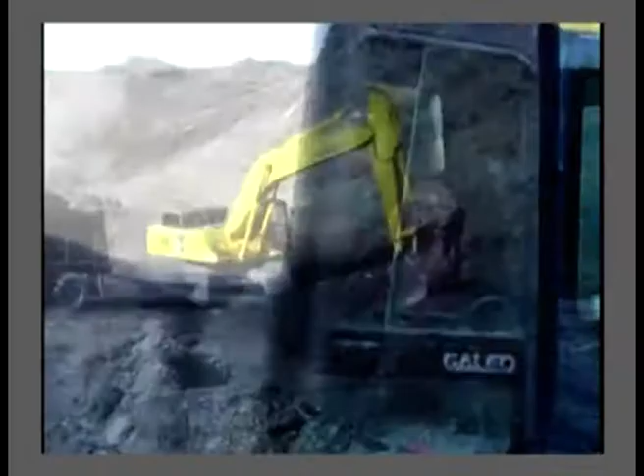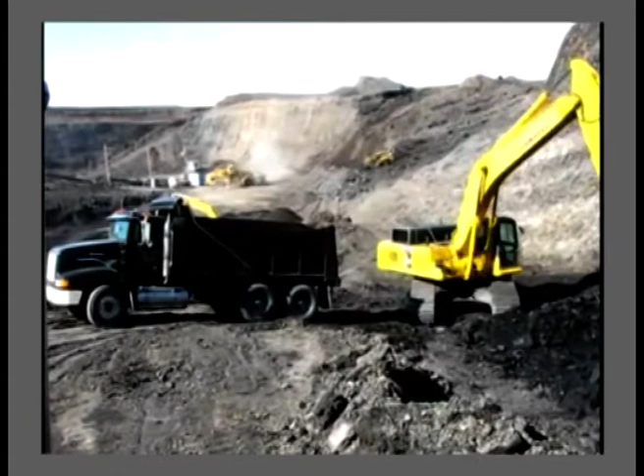Module 1. Methane is a gas formed as a part of the process of coal formation. When coal is mined, methane is released from the coal seam and the surrounding disturbed rock strata. Methane can also be released as a result of natural erosion or faulting. The methane content in coal seam generally increases the deeper the seam exists and also with its age.

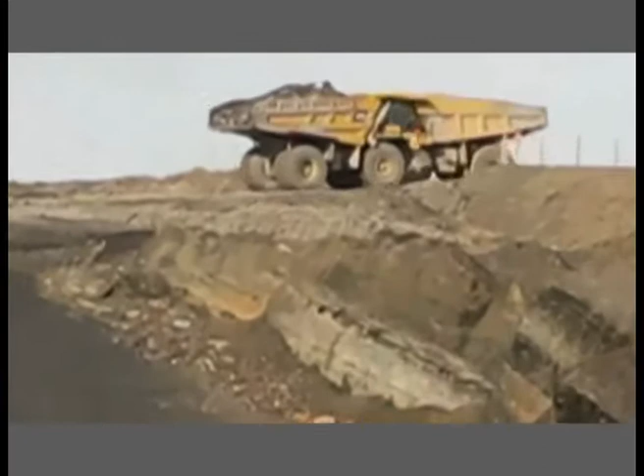As the depth of the coal seam increases, so does the pressure level. This in turn reduces the level of permeability, causing methane to be much more tightly bound to the coal and surrounding rock strata. Underground mining can therefore produce substantially greater levels of methane than surface mining. In fact, underground mines account for the overwhelming majority, up to 90%, of all methane emissions from the coal sector.

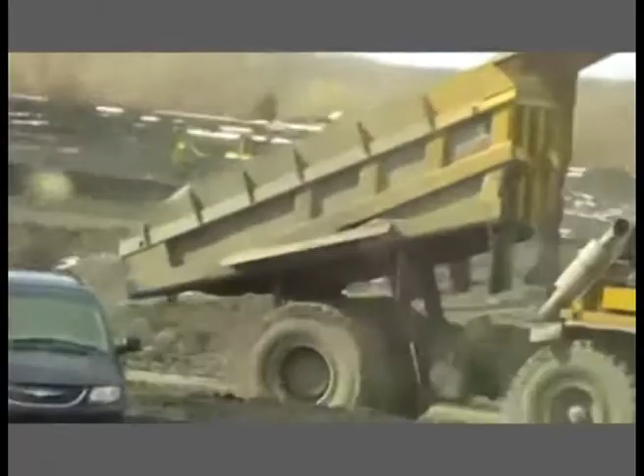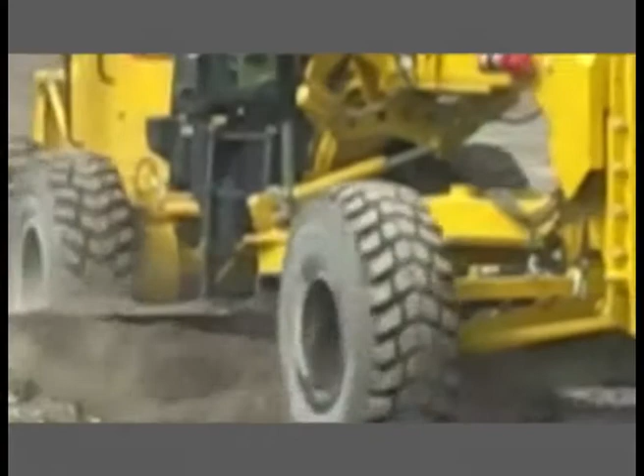When coal is mined underground, this methane not only becomes a potent source of pollution and accident by way of explosions, but also it adds to the ventilation cost. Furthermore, it adds to the volume and quantity of GHG, greenhouse gases, when exhausted from the underground in the surface atmosphere.

Thermal power plants are the single largest stationary source of pollution in any country. The toxins these coal-fired power plants produce severely damage both human health and the environment. This in turn lowers the quality of life. Additionally, it also exerts severe adverse impacts on the wildlife, aquatic life, plants and trees, etc.

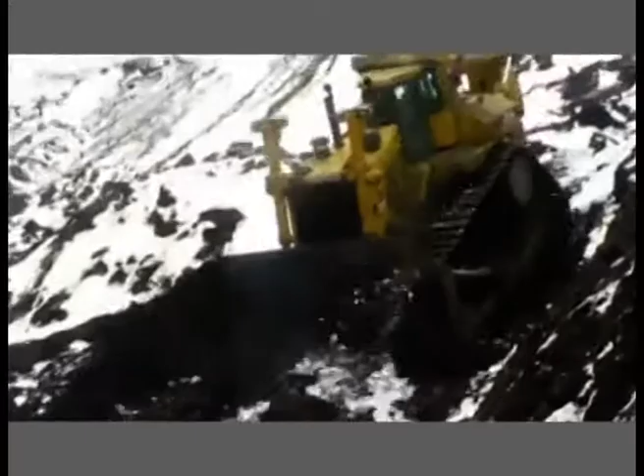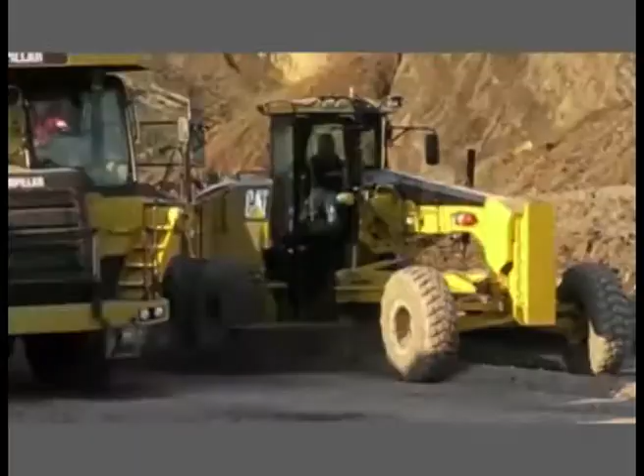Besides carbon dioxide, other major ingredients in the polluted air due to coal burning include sulfur dioxide, nitrogen oxide, carbon monoxide and fly ash. Given this, the mining as well as burning of coal are increasingly gaining the attention of all concerned, not only as a prime energy resource, but also because of a host of environmental challenges offered due to the mining and burning of the coal.

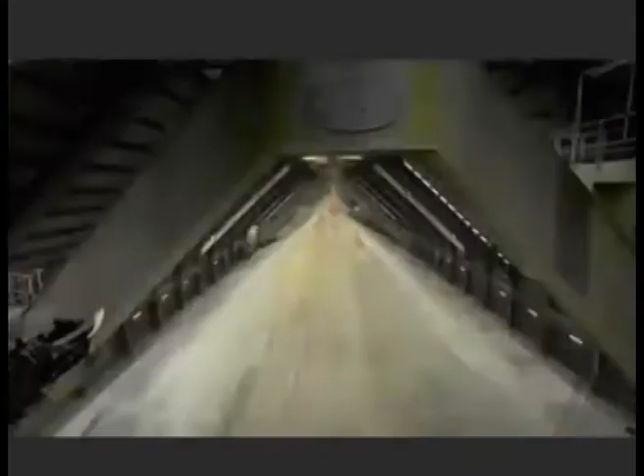Module 2. This module consists of description of atmospheric impact of the gases and fly ash. Let us discuss the impacts one by one. To start with, sulfur dioxide, SO2. Sulfur dioxide is emitted during burning coal and other fossil fuels, of course. While burning, the coal converts into acid gases, that is sulfuric gases and sulfur particulate matter. These gases and particulate matter are emitted in the atmosphere. It is a major causation of acid rains, as will be described later.

The health effects of these emissions on human beings include airway irritation, heart rhythm destabilization, asthma attacks, etc. Number 2 is nitrogen oxide, popularly known as NOx. It is a main ingredient in acid rain and ozone smog.

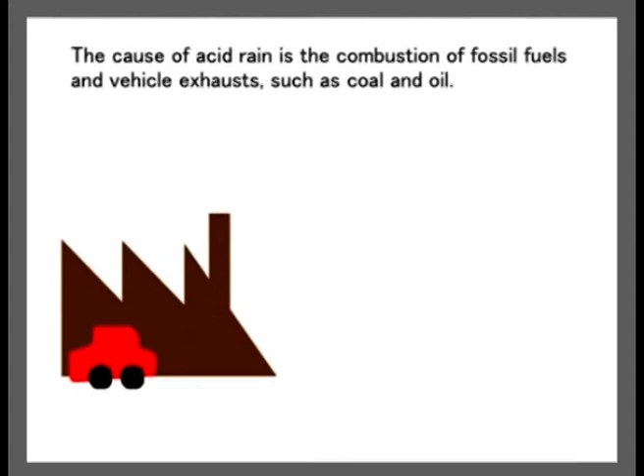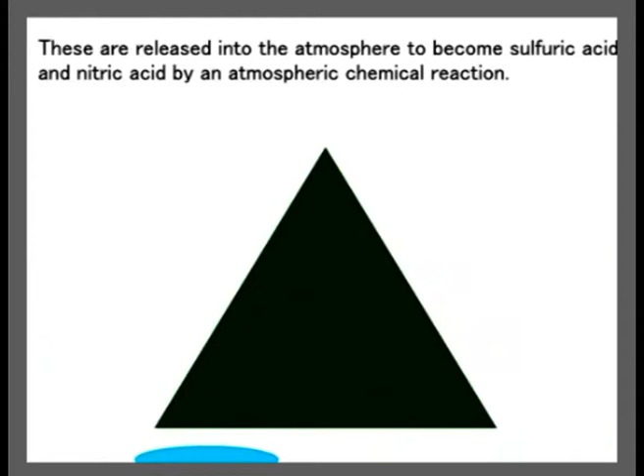Acid rain. Acid rain or acid deposition occurs when sulfur dioxide and nitrogen oxide react with water and oxygen in the atmosphere to form acidic compounds, most commonly sulfuric and nitric acids. These acidic compounds then either mix with natural precipitation and fall to the earth as acid rain, or remain dry and then settle to the ground.

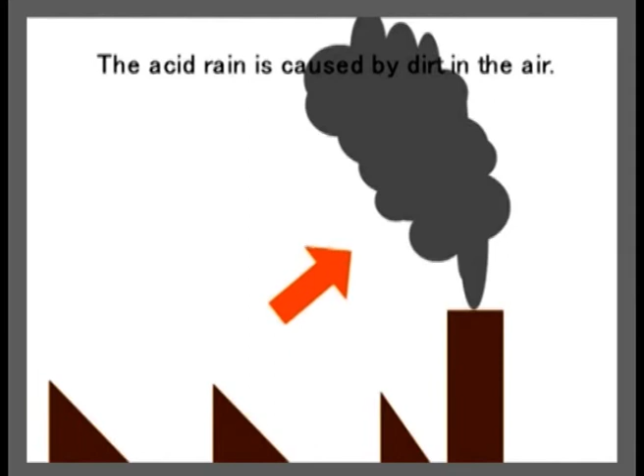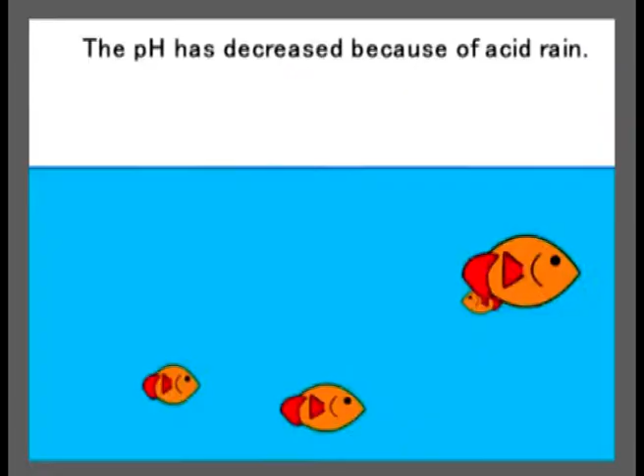Acid rain destroys ecosystems, including streams and lakes, by changing their delicate pH balance, making them unable to support life. Acid rain can destroy forests, devastate plant and animal lives, and at times it may also adversely affect man-made monuments and buildings to effectively destroy natural and historical treasures.

Number 2 is the ozone smog. The ozone smog is formed at ground level when sunlight mixes with nitrogen oxides and hydrocarbonaceous vapors emitted by power and mining plants. It contributes to airway irritation, coughing, wheezing, asthma attacks and immune suppression.

Number 3 is the carbon dioxide. Coal-fired electric power plants comprise the single biggest source of carbon dioxide emissions in the world. Burning of coal releases carbon dioxide in the atmosphere, and it is needless to reaffirm that carbon dioxide is the largest source of greenhouse gases, GHG, in the world. Currently, there is almost 30% more carbon dioxide in the atmosphere than at the commencement of the Industrial Revolution.

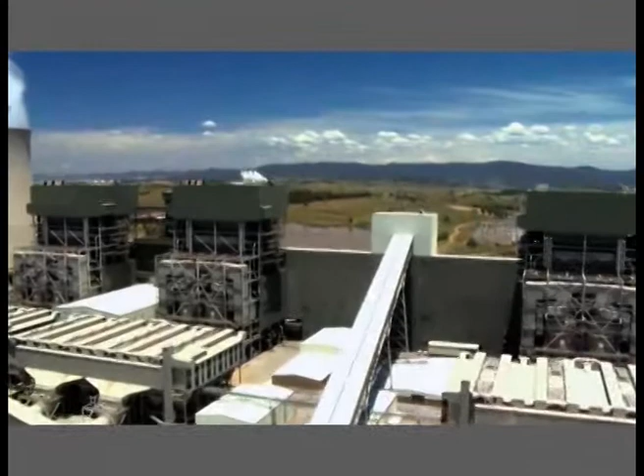Furthermore, we are well on the way to doubling the carbon dioxide level in the atmosphere during this century itself. So amazing. However, coal-fired power plants have the highest output rate of carbon dioxide per unit of electricity among all fossil fuels.

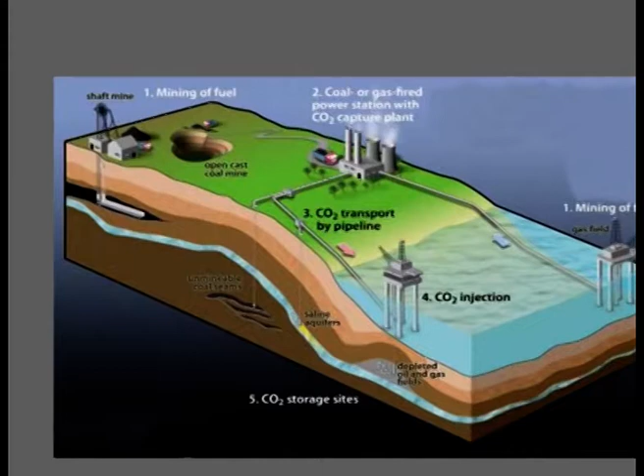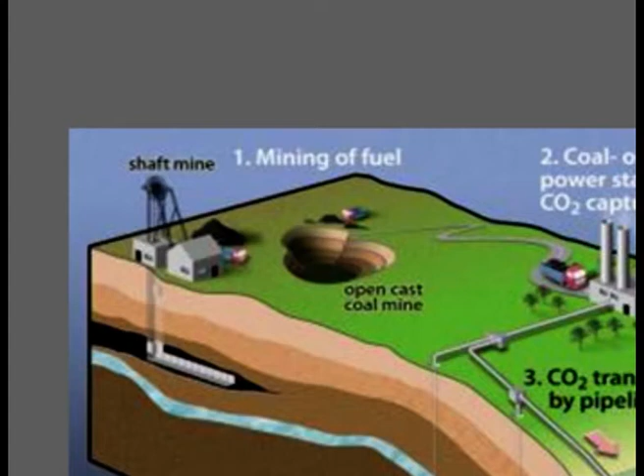Now, figure 1 will illustrate the release of carbon dioxide to the atmosphere by various sources and also its safe disposal sites. The figure 1 illustrates that there is a mining shaft which is mining coal from the underground deposit. Then there is an open cast mine, coal which is lying beneath the surface of earth, and thereafter you can also see the mining of fuel offshore.

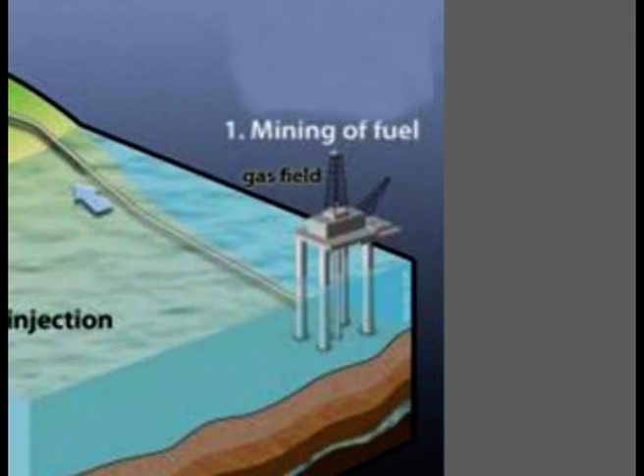All these 3 units are mining fossil fuels and transporting the fossil fuel to a coal or gas fired power plant which delivers carbon dioxide to the atmosphere. If it is delivering the carbon dioxide to the atmosphere, it will be dangerous because, as already explained, carbon dioxide is a greenhouse gas. So, we need to capture this gas at the plant and we have to dispose it at the safe sites.

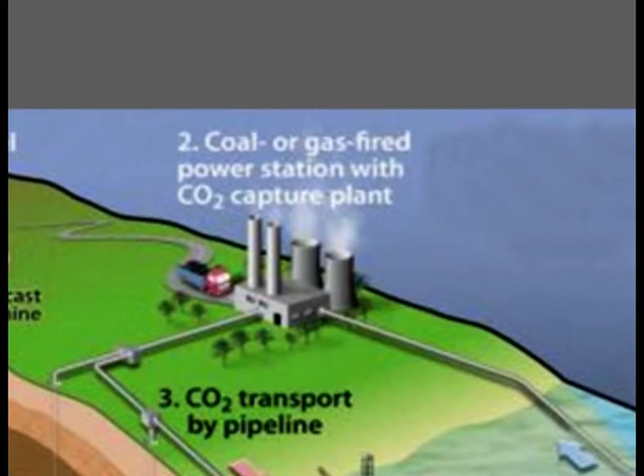Illustrated in the figure, you can see that a pipeline is bringing the carbon dioxide which has been captured in the thermal power plant or gas fired power station. It is being transmitted through the pipeline to the unminable coal seams, the saline aquifers, and the third point is the depleted oil and gas fields.

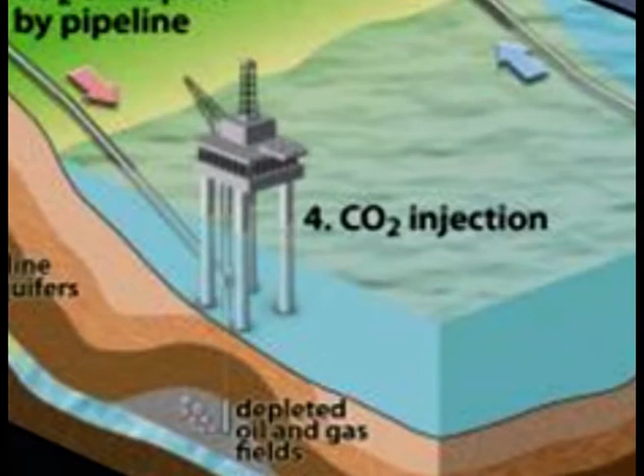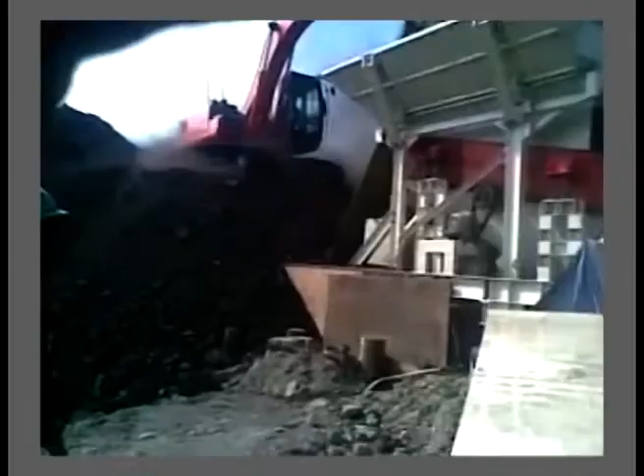Number 2 is the fly ash. Fly ash primarily comes from coal fired electricity generating power plants. These power plants grind coal to powder fineness before it is burnt. Fly ash, the mineral residue produced by burning coal, is captured from the power plant and it is exhausted and collected for use. Fly ash is a fine glass powder recovered from the gases of burning coal during the production of electricity. These micron sized earth elements consist primarily of silica, alumina and iron.

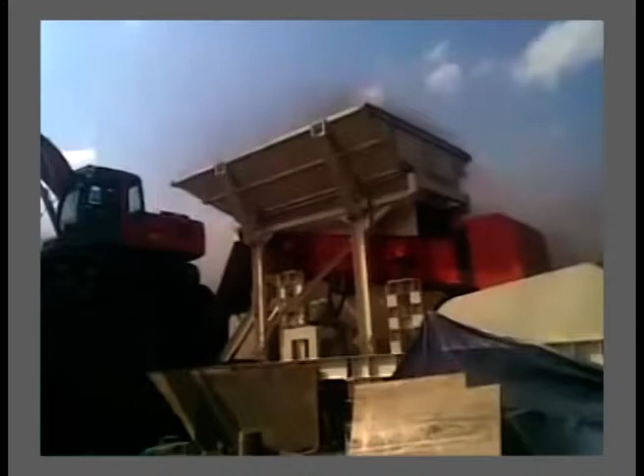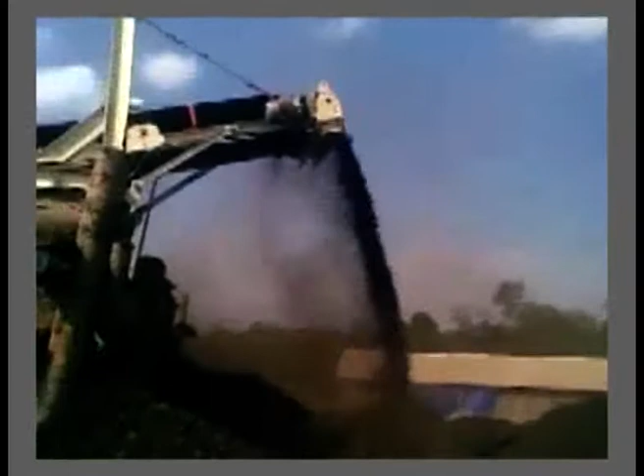Coal fired power plants using pulverized coal or lignite as fuel generate large quantities of fly ash as a byproduct. With the increase in commissioning of several super thermal power plants with large capacity and with the increasing use of low grade coal of high ash content, the amount of generation of ash from them is increasing at exponential rates. This poses serious ecological problems.

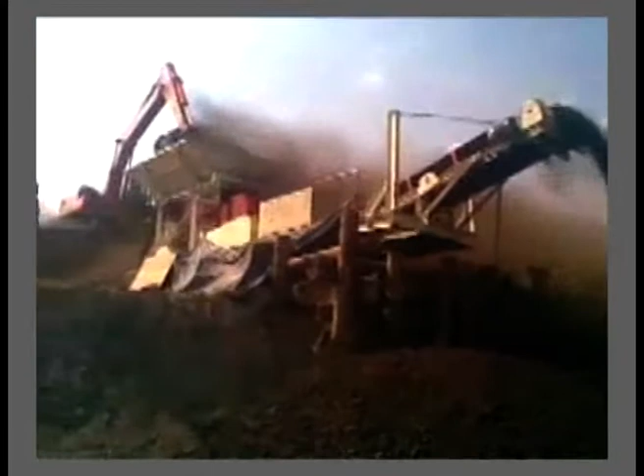Most of the ash generated from the power plants is disposed of in the vicinity of the plant as a waste material, covering several hectares of valuable land. Looking at the nuisances posed by fly ash, there exists an emergent need for its safe disposal and effective utilization. The properties of fly ash depend on several variables such as coal source, degree of pulverization, design of boiler units, loading and firing conditions, handling and storage methods, etc.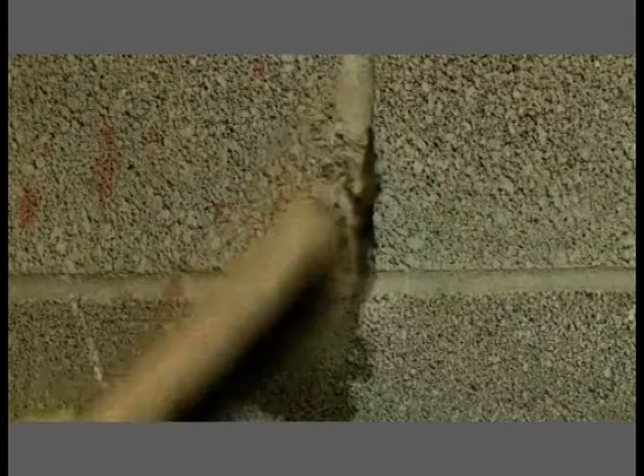In an industrial context, fly ash usually refers to ash produced during combustion of coal. It includes substantial amounts of silicon dioxide, both amorphous and crystalline, and calcium oxide. In earlier times, fly ash was generally released into the atmosphere, but pollution control equipment mandated in recent decades requires its capture. The fly ash is generally stored at coal power plants or placed in landfills. It is often used as a pozzolan to produce hydraulic cement or hydraulic plaster, or as a partial replacement of Portland cement in concrete production.

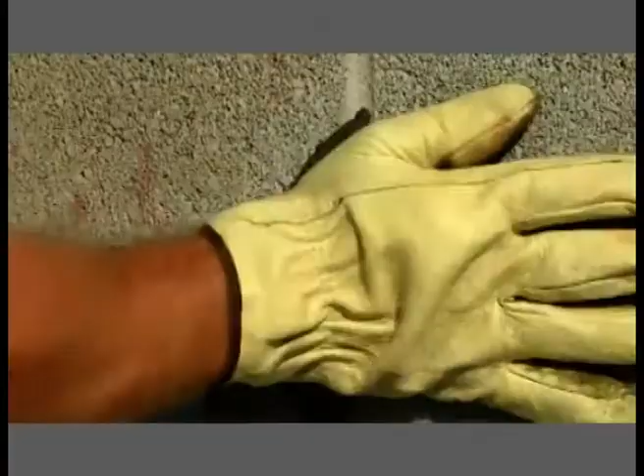At present in India, the focus is on demonstration of coal ash utilization technologies such as fly ash characterization, its agricultural related studies and applications, construction of ash ponds and dams, roads and embankments, and also reclamation of ash ponds for human settlement, underground mine fills, etc. Only a small quantity of the total ash produced is utilized in concrete, brick making, soil stabilization treatment, etc. The bulk utilization of ash is yet to begin in full swing.

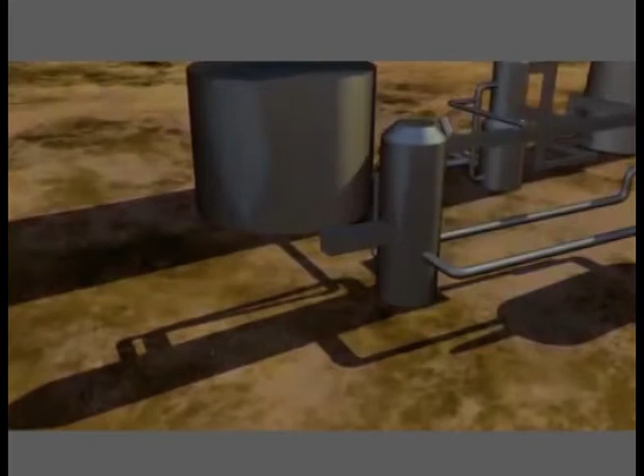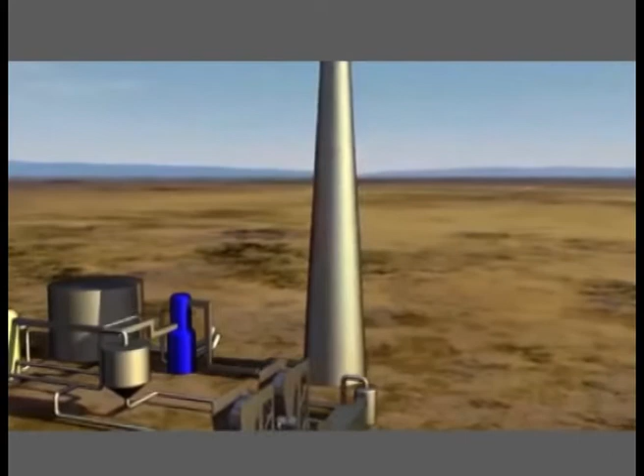Number 3, remedial measures. What are the remedial measures to overcome the challenges posed to the atmospheric conditions by these gases? So, let us discuss one by one each of the gases and how to overcome the threats posed by them. Number 1 is sulfur dioxide. Flue gas desulfurization (FGD) systems are used to remove sulfur dioxide. Wet scrubbers are the most widespread method and can be up to 99% effective. A mixture of limestone and water is sprayed over the flue gas.

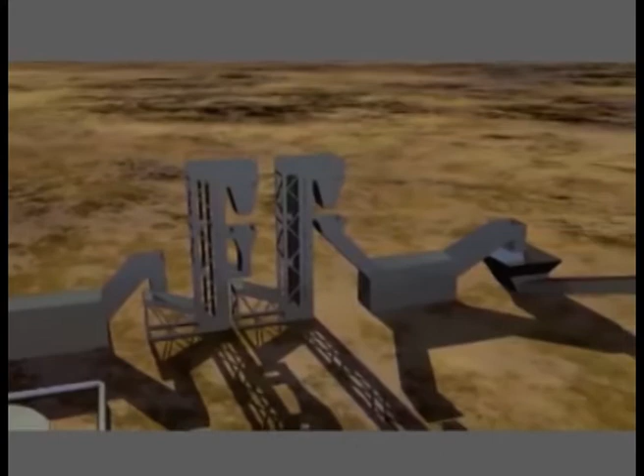Flue gas is the gas which is exhausted from the power plants. So, this flue gas has to be mixed, and this mixture reacts with the sulfur dioxide to form gypsum, a calcium sulphate, which is removed and used in the construction industry.

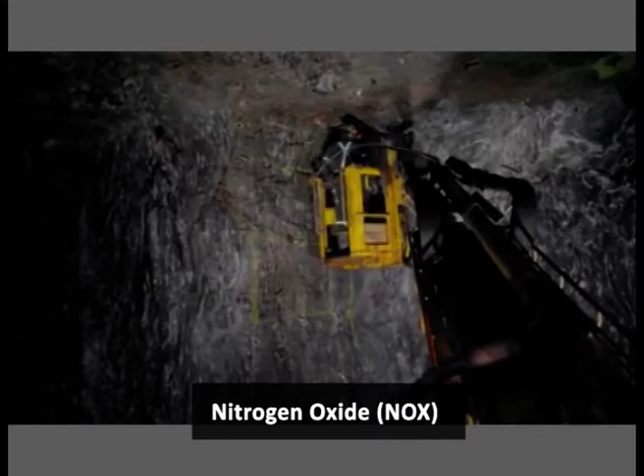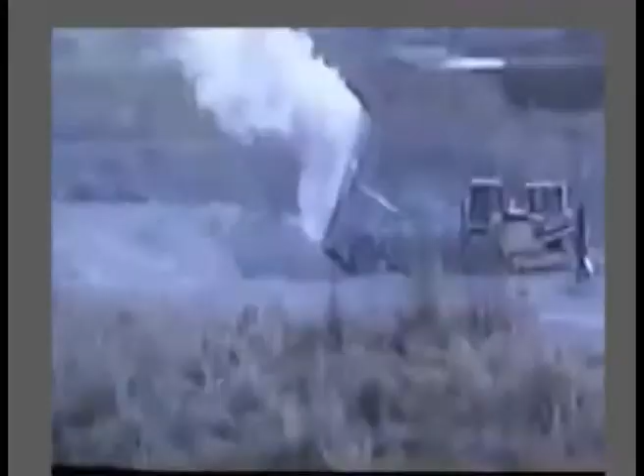Next is nitrogen oxide, NOx. NOx reduction methods include the use of low NOx burners. These specially designed burners restrict the amount of oxygen available in the hottest part of the combustion chamber where the coal is burnt. This minimizes the formation of the gas and requires less post combustion treatment.

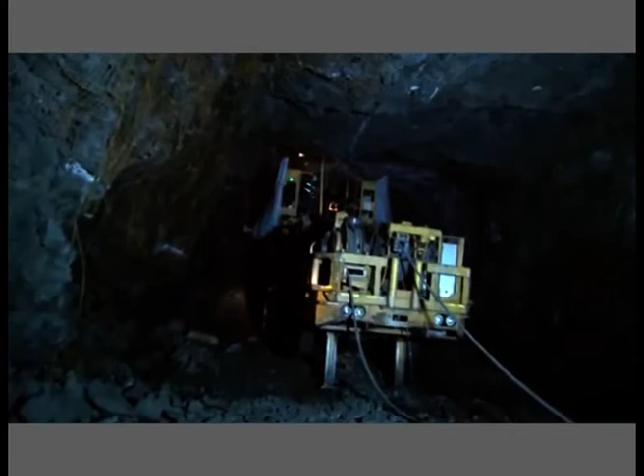NOx burners reduce NOx emission by 40%. Further, reburning reduces it to almost 70%, followed by selective catalytic reduction to finally clean the flue gases from NOx up to 90%.

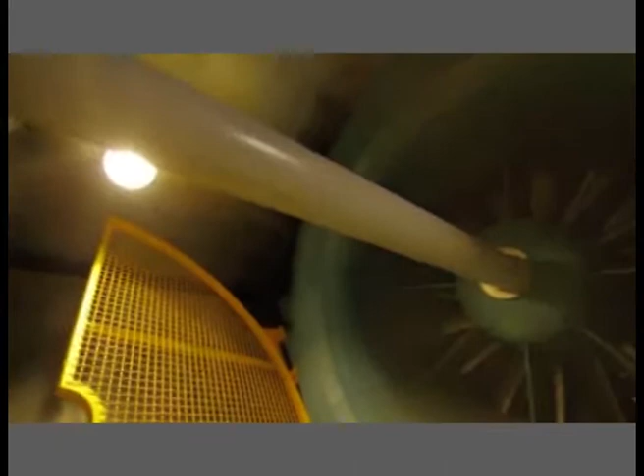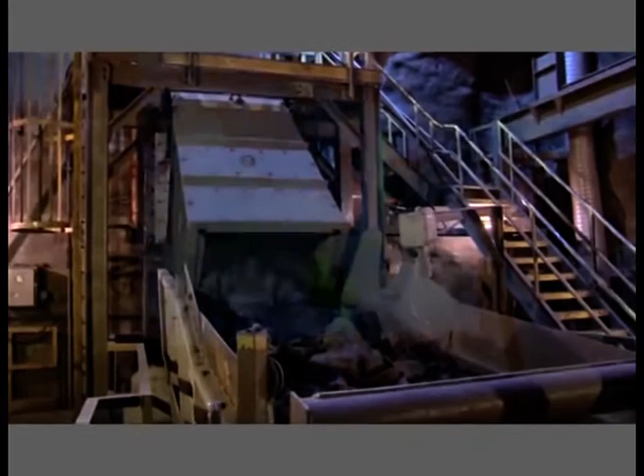Next is particulates emissions, and how do we overcome the problems which are posed by the particulate emissions. So, in this, electrostatic precipitators can remove more than 99% of particulates from the flue gas. The system works by creating an electrical field to create a charge on particles which are then attracted by collection plates. Other removal methods include fabric filters and wet particulate scrubbers.

Electrostatic precipitators in conjunction with fabric filters are capable of removing almost 99% of fly ash from the gases. Also, coal washing reduces emission of ash and sulfur dioxide.

Now we discuss the innovative clean coal technologies which are coming up very fast in order to clean these gases and provide the alternative technologies which may remediate these gases. So, first is the sequestration. What is sequestration? Sequestration refers to capture and disposal of liquid carbon dioxide into deep geological strata. The potential disposal sites are depleted oil and gas fields, unminable coal seams, deep saline aquifers.

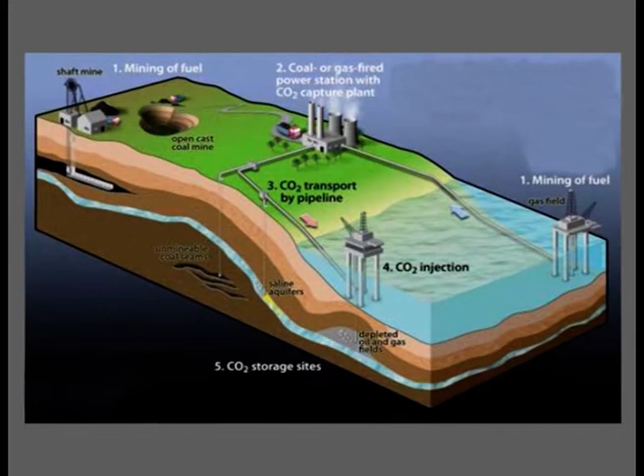It entails the technology of capture of carbon dioxide from the flue gases and store them into the deep saline aquifers. It can also serve the oil and gas industry for enhanced oil and gas recovery from oil wells. It comes under the domain of carbon capture and storage, which is known as CCS.

Researchers have lately explained certain risk factors associated with sequestration. The technique may render the rocks very weak and poses the threat of sudden eruption in disastrously large volume. For effective sequestration, rock should be permeable and very strong.

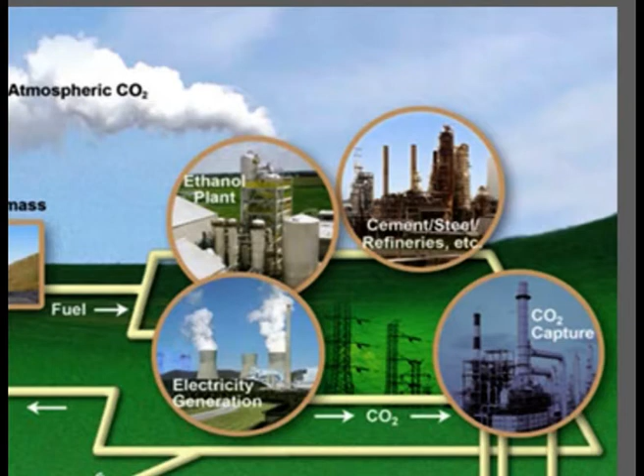Figure 2 shows the carbon dioxide capture and sequestration. In this figure, we can see that coal or any other biomass or fossil fuel is being sent to the industry for electricity generation, cement, steel, refineries, etc., and ethanol plant. All of these industries generate huge amount of atmospheric carbon dioxide.

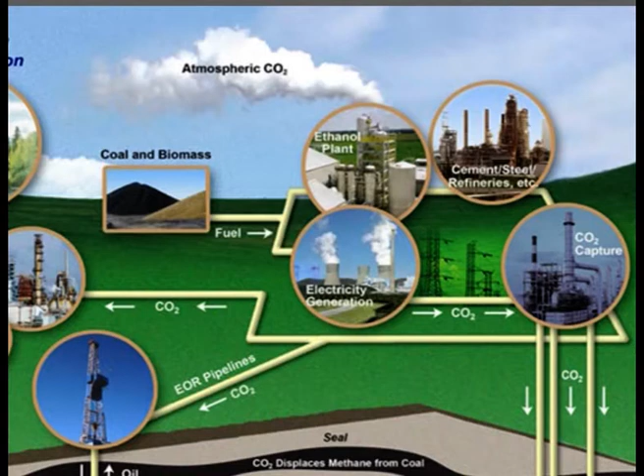Now, a small amount of this atmospheric carbon dioxide is subjected to terrestrial sequestration by the vegetation. However, if a large amount of carbon dioxide is released in the atmosphere, it will be a challenge to the atmosphere. So, this carbon dioxide capture plant has to capture the carbon dioxide and also has to dispose it safely. So, what are the disposal sites? These disposal sites are also shown in the figure.

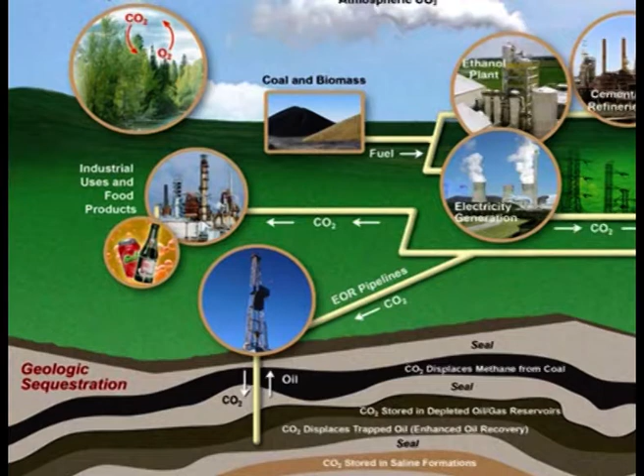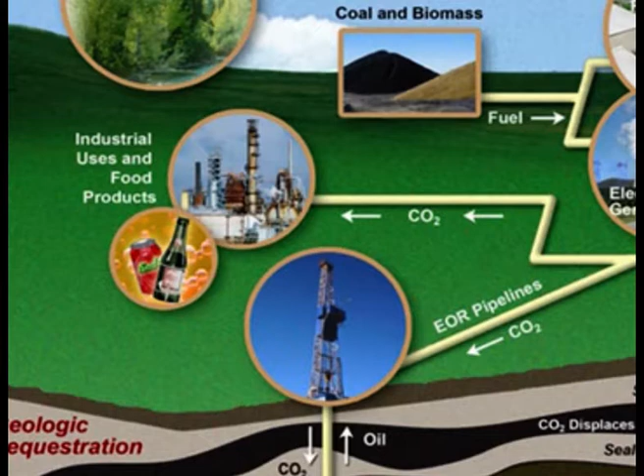Some of the industrial units may be requiring carbon dioxide, and so a portion of the captured carbon dioxide can be sent for the industrial uses and food product industry, etc. Another part of the carbon dioxide has been shown to be sequestered. This carbon dioxide which has been sequestered can raise the oil from the depleted oil wells, and this is known as enhanced oil recovery. So, sequestration can be positively used for the enhancement of oil recovery.

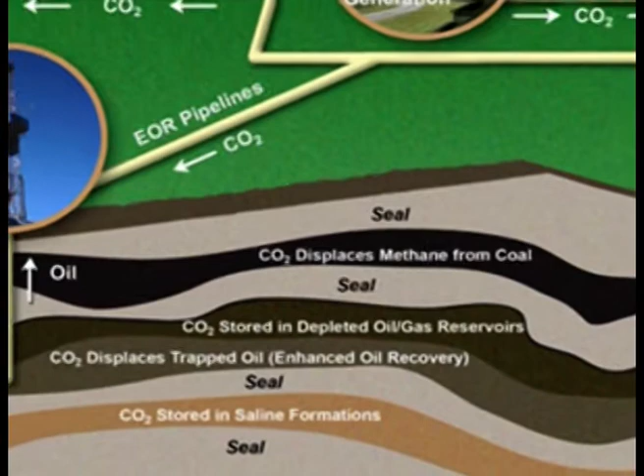Another part of the carbon dioxide can be used for displacing the methane from the coal seam, and the method is known as enhanced coal bed methane recovery. And still, the carbon dioxide can be stored inside the deep saline formations, which are also known as deep saline aquifers. So, these are the possible sequestration sites for the captured carbon dioxide.

Next technology is underground coal gasification. The underground coal gasification implies conversion of coal into gas with or without entering the coal seam by mining and non-mining methods. The gas can be sent by pipelines to the industrial units for energy generation.

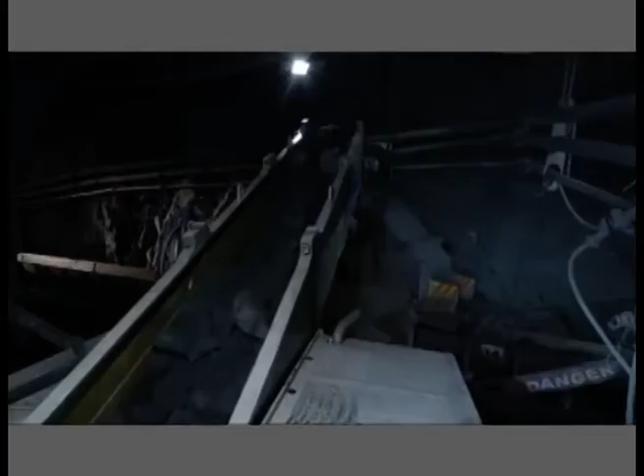The non-mining method, as illustrated in figure 3, gains prevalence because of elimination of drilling, blasting or cutting, loading, supporting and transporting costs. It is very environment friendly since it entails minimum land, water, air and ecological pollution.

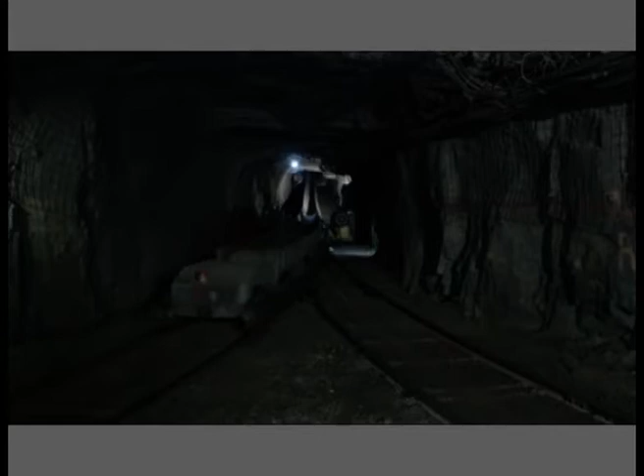Method is, however, very restrictive in nature and normally suited for low grade subbituminous and lignite deposits with high hydrogen to carbon ratio, higher volatility and low coal plasticity.

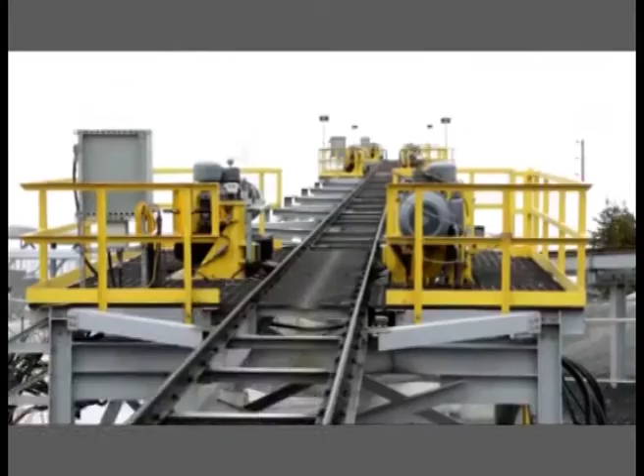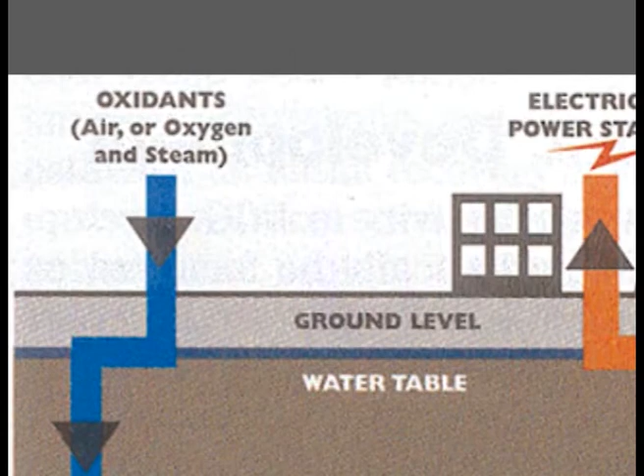Now, figure 3. This figure 3 shows the non-mining method of underground coal gasification, wherein you can see the injection well and the gas offtake well, and the air or oxygen or air enriched with oxygen or hot steam can be sent through the injection well. It will oxidize the coal in a controlled manner and the gas would be formed and coal will be converted

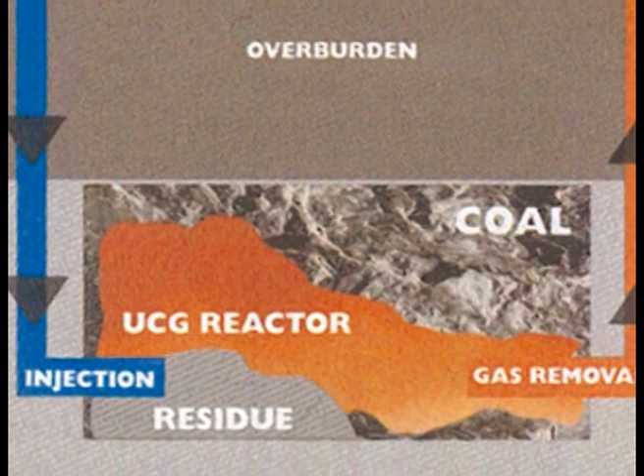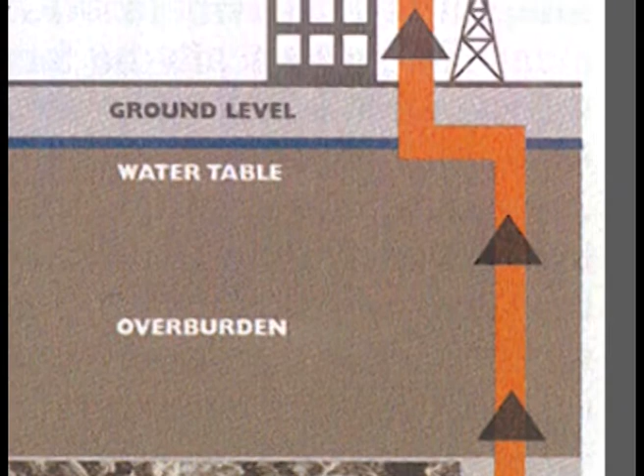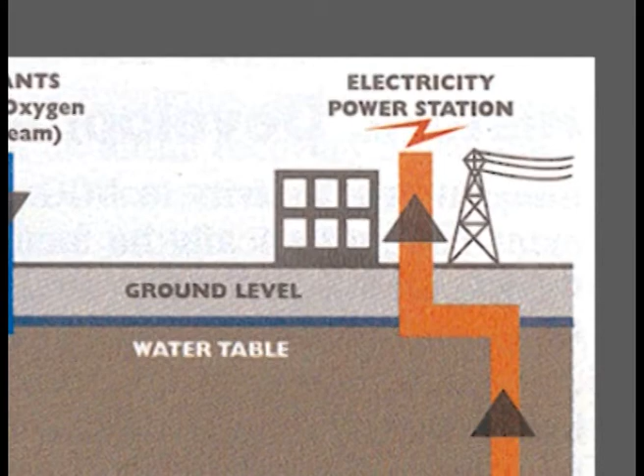into gas, and this gas can be brought out to the surface from the offtake well and it could be directly used without cutting or breaking of the coal, and that is the technique of gasification, where we convert the coal directly into gas without using any drilling, any blasting or any transportation of coal.

Next is coal bed methane extraction, which is gaining popularity nowadays in our country as well. A range of technologies are available to recover methane from coal, and these can be broken down into 3 categories. Coal bed methane extraction is number 1. In this technique, methane is recovered from the unmined coal seams. The coal seams may be mined in the future, but this is largely dependent upon geological factors such as coal depth and quality.

Number 2 is abandoned mine methane, AMM. Methane recovered from mines that have been abandoned following the completion of mining operations. Significant amounts of methane may remain trapped in the mine or may continue to be emitted from the openings. This methane has to be tapped, and this is known as abandoned mine methane.

Then the number 3 is coal mine methane, CMM. Methane is recovered during the mining activities as the coal is in the process of being extracted and thus emitting significant quantities of the gas.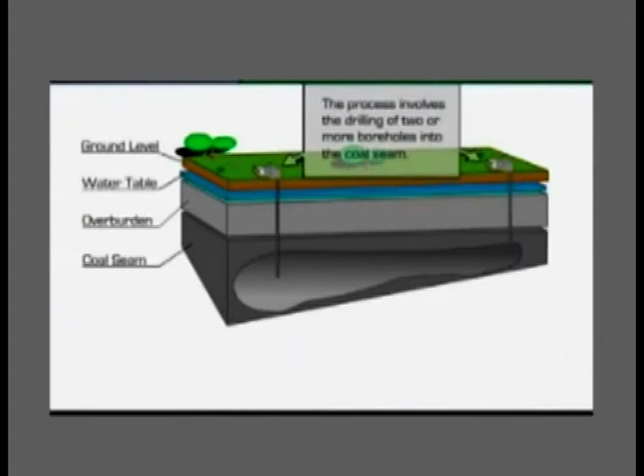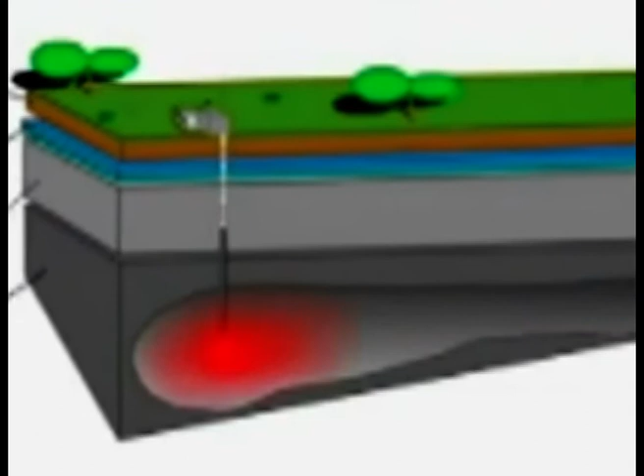Indirect liquefaction processes generally involve gasification of coal to a mixture of carbon monoxide and hydrogen, popularly known as syngas, and then using a process such as Fischer-Tropsch to convert the syngas mixture into liquid hydrocarbons.

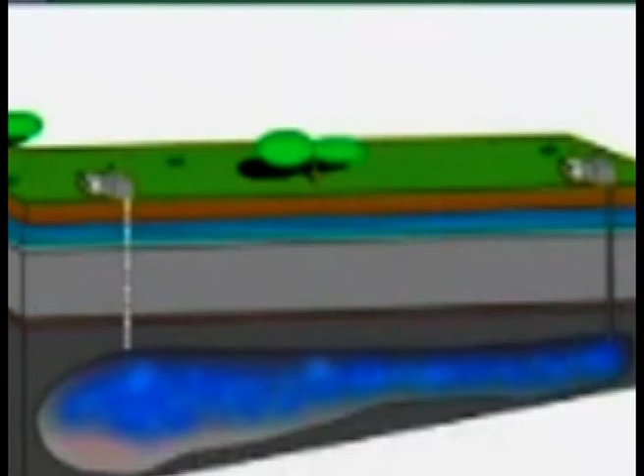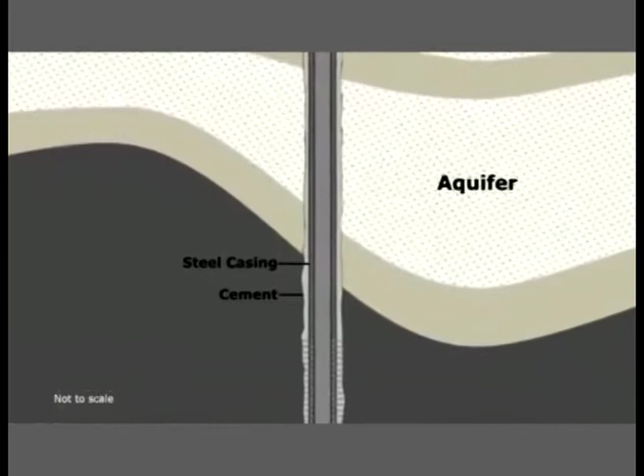On the contrary, direct liquefaction processes convert coal into liquids directly without the intermediate step of gasification by breaking down its organic structure with application of solvents or catalysts in a high pressure and temperature environment.

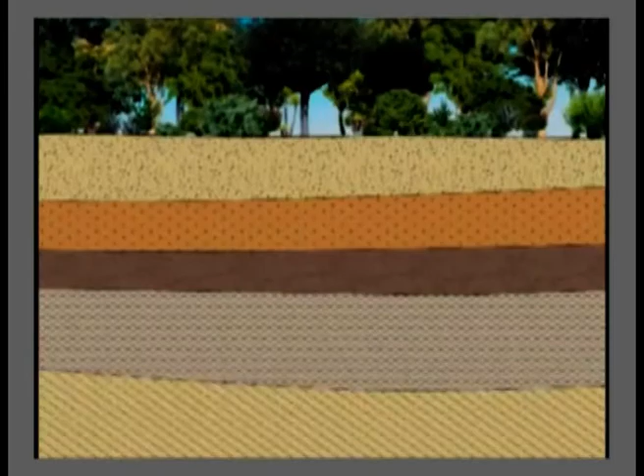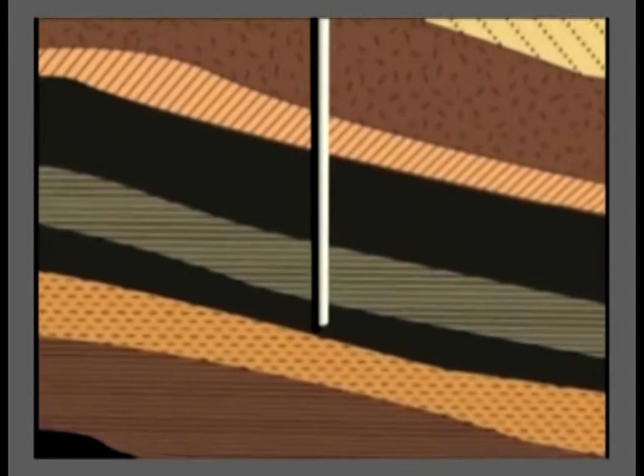Most coal liquefaction processes are associated with significant carbon dioxide emissions resulting from requirement of heat and electricity. However, synthetic fuels produced by coal liquefaction process tend to be cleaner than naturally occurring crudes, as heteroatom, for example sulfur, compounds are not synthesized or are excluded from the final product.

So, here is the time for the conclusion, and let me conclude. Following are the main conclusions which may be drawn from the present work. Number 1, coal is absolutely important fossil fuel which occupies the center stage of global natural energy resources. Coal and coal mining industry worldwide shall retain its supremacy in energy generation and other industrial applications in future for almost 150 years.

As for now, number 2, a host of atmospheric challenges are brought forward by coal mining because of release of entrapped methane during mining and release of carbon dioxide, sulfur dioxide, nitrogen oxide, NOx and fly ash during the burning of coal in the thermal power plants. Number 3, to combat the challenges, the need of emerging and innovative technologies is very important vis-a-vis the global concern on environment and climate change.